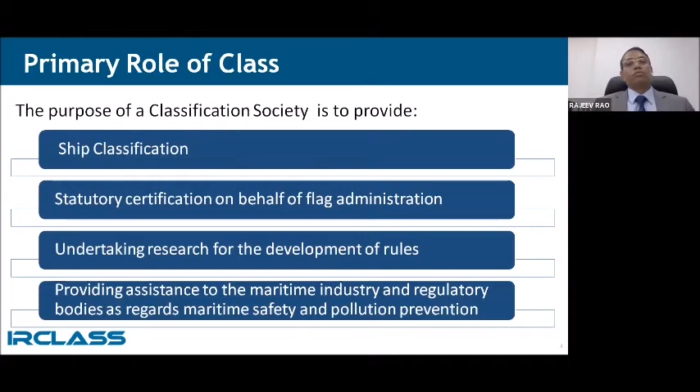So the role of the class is changing every day, because what the class role used to be 10 years back, that is not there now. The role of the classification society has changed considerably. While enhancing safety of life and protection of environment remains at our core, today we are seen as a facilitator rather than a regulator. Within the larger realm of safety and compliance, we are helping the industry to comply with the various regulations. So to catch up with all these new requirements, new regulations, the role requires class to innovate and upscale its resources. We have to catch up with the technology, we have to catch up with the time.

What does industry expect from class? Because there are some expectations from the industry. The industry expects that class should provide guidelines in dealing with new subjects and new regulations, because they need the interpretation by the class and they need guidance from the classification society for the implementation part. Then the class society needs to have training and seminars to bring awareness to all the stakeholders. As I said earlier, the rules and procedures need to be developed as per the IACS and IMO changing rules and regulations.

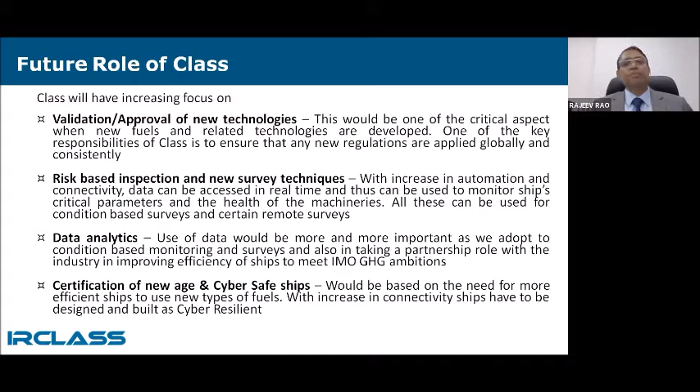Okay, this is the most talked about thing at the moment, remote survey techniques. Like other classification societies, like other inspection bodies, IRS has also adopted this technique because COVID-19 pandemic accelerated the use of remote surveys. Now, when the travel restrictions are there, no one can attend the vessel, no one can travel. This has become the only tool to keep the certificates validated, to keep the global supply chain intact.

Of course, the classification society received very able support from all the flag administrations by means of their communication, by means of the circulars released by them. But as a classification society, we very proactively developed a procedure, the uniform procedure to carry out remote surveys. The advantage of this procedure is there is a uniformity all over the world. Wherever you go, whichever port you are offering the vessel for survey, the requirements remain the same.

So the moment we receive a request for remote survey, we are following the procedure. We communicate to the owner managers with the requirements, and so they are also very comfortable. They also know what is the expectation by the classification society. So this is remote survey process. The flag concurrence we are taking for all statutory surveys, or wherever we need some advice from flag, we are communicating with them. We are taking their point of view, apart from the circulars which they are releasing time to time.

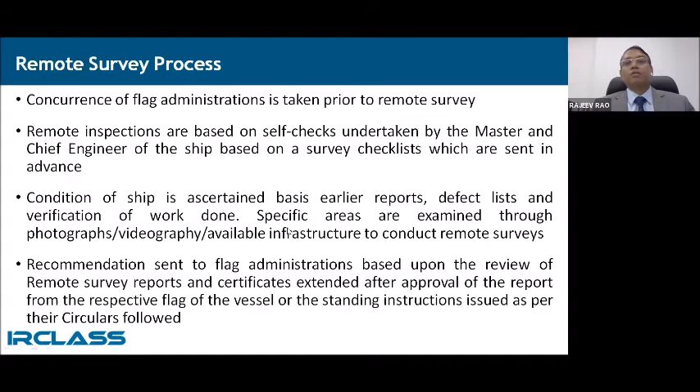Okay, so as you all are aware, this COVID-19 is going to stay for some time. And as a matter of fact, one needs to adopt a policy. What happens after COVID-19? So we are developing a tool that even after COVID-19, just to minimize the travel of the surveyor and the cost of the owner, based on the experience gained by us, we may extend our surveys to credit annual survey, docking survey, and various other surveys. So for that purpose, we are developing the infrastructure.

That means we are having the dedicated remote survey control room, which is equipped with the TV screen and the audio system. And similarly, we are training our surveyors for the use of monitors, webcams, and audio equipment. Of course, we need support from the industry because internet connectivity plays a very vital role for remote surveys, and it all depends how good is the connectivity. Because many a times we have seen when you go for live streaming, the footage is not so clear and it is not continuous. So it is very, very important to have good internet connectivity, and the owners need to also provide the infrastructure to facilitate remote surveys.

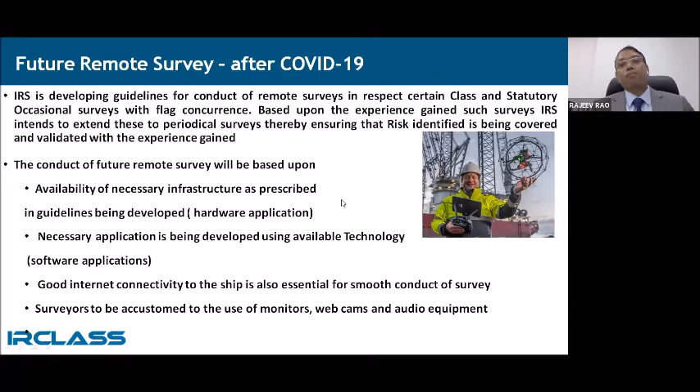And then IRS digitalization and new initiatives: we are issuing all electronic certificates. The drawings and plans are submitted, reviewed, approved, retrieved, all electronically through our website. We are archiving all the plans, all the manuals, all the records electronically. Survey requests are being made through website and mobile application. We are into vessel performance analysis and energy efficiency analysis, cyber security, and we are working for autonomous ships.

The IRClass website, you can visit our website www.irclass.org. It has got a lot of information. Please do visit our website and give us the feedback. The drawings are all submitted through this website. Even the survey requests are done. Service supplier approval requests are made through this website.

We have a mobile application which can be downloaded from Google Play Store and Apple Store, which has the features of survey request form, the list of type and works approvals, upcoming regulations. You can search any ship. We have technical circulars also, our rules and notification alerts; like new rules and regulations coming into force, you will keep getting the notification.

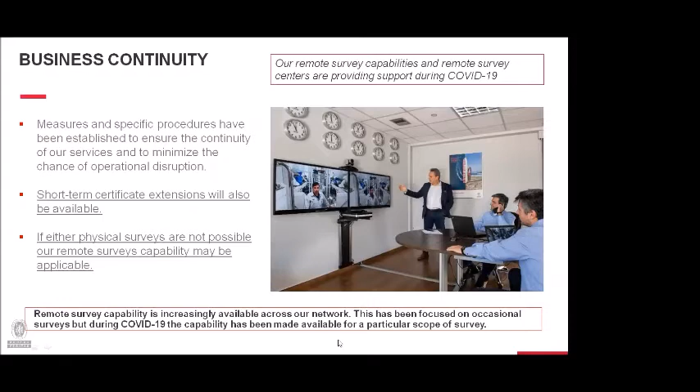Yeah. Can we go to the next slide, please? Okay.

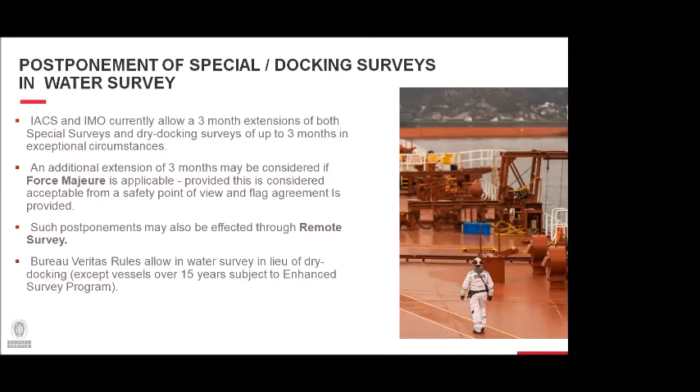And of course, speaking of remote surveys, these are applicable also for ISM, ISPS, and MLC audits, extensions to a certain extent. We're doing that. And to cover all, I must mention that new building surveys also, to some extent, could be done via remote survey. For new building surveys, surveys at yards should be done considering the HSE conditions are met. Participation of BV surveyors in sea trials may be allowed in accordance with required HSE requirements as well. These requirements must be established before a sea trial happens and maintained during the sea trials.

Postponement surveys, of course, can be done for boiler surveys. 3-month extensions as a standard under the strict IMO and IACS rules can be granted. And further 3-month extensions are possible in force majeure cases, proving the force majeure cases. We mentioned continuous survey machinery items and, to a certain extent, again, life-saving and firefighting appliances and systems can be postponed or remotely surveyed.

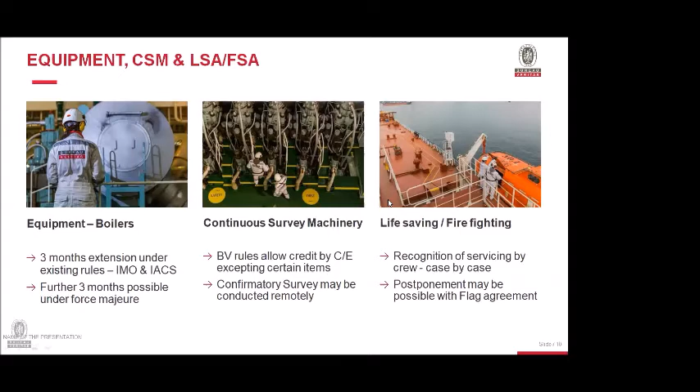Yeah. Next slide, please. Next one, please. Thank you.

Yes. To sum up the first part of my presentation, I must mention again that the health and safety of the people, clients, BV people, crew on board, and all stakeholders is paramount. On the other hand, the global continuation of BV surveys during this pandemic period is vital to support the shipping industry and business without compromising safety.

In the second part of my presentation, I would like to give a quick look at recent developments with regards to digitalization or digital transformation. Not just now, but over the last year, the popular word is digitalization or digital transformation, as you all know, everywhere, in every segment, in every industry. Today at Bureau Veritas, we are on track to take the next step in digital transformation, what we call digital classification, because we believe that this is the future of classification.

So how does this work? We ask 3 simple questions. First, does the ship have any expected surveys or audits in the near future? We know the answer to this question. Through our systems and software, we know what survey is coming next month. The second question is: in which port is the ship expected in the near future?

We are in cooperation with several industry players through our partnerships to get the data through AIS data partners. Or simply, of course, clients can give us this information upfront. And then the third information: are there any qualified and available surveyors in this expected port?

And then after these three questions, I must say that our little magic box is working, making optimization and coming out with an outcome proposition to owners, telling them that your ship is going to blah, blah port on that day, annual surveys are due, and we have Mr. A available on that day. And it's just up to the superintendent to click the button and confirm the surveyor.

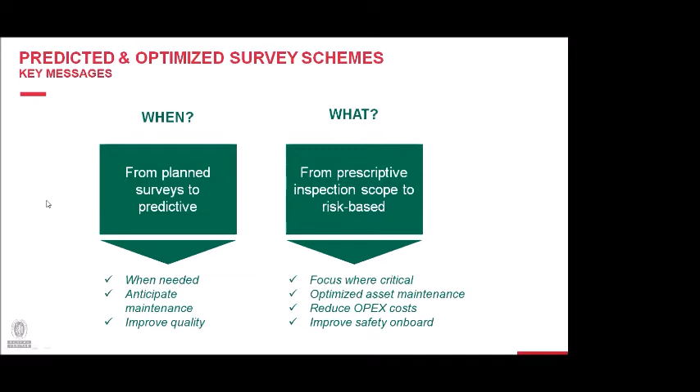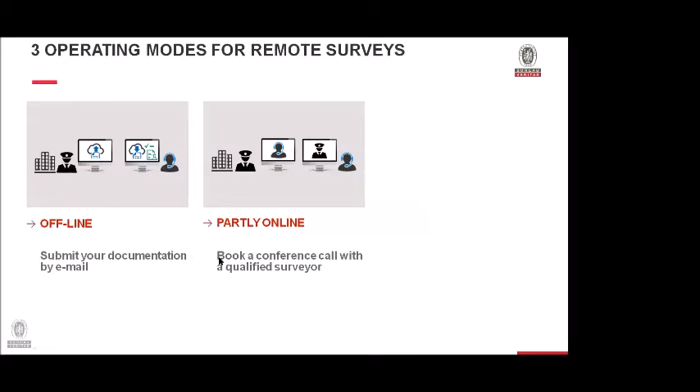And another topic, of course, next slide, please. Next one. Remote surveys. We are looking at remote surveys from the Bureau Veritas point of view. We are grouping them in three categories: offline surveys, partly online surveys, and fully online surveys. Offline surveys are pretty simple, and partly online surveys work the same way.

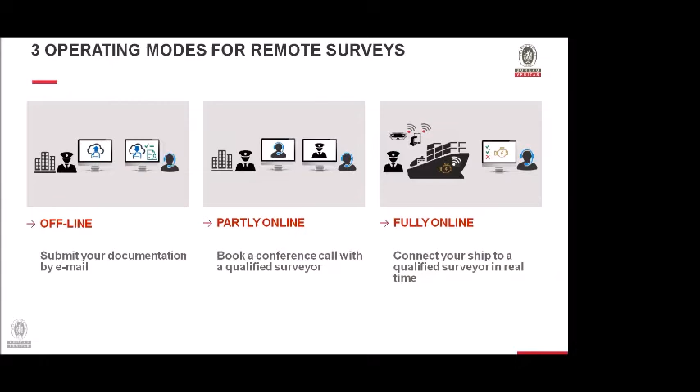Just submittal of the videos, objective evidence, documentation, reports, records via email or through any software environment is enough for us. We are deleting recommendations as much as possible, after strict evaluation by our technical experts, or postponing. When it comes to fully online surveys, next slide, please. Yes.

Fully online surveys, as my colleagues mentioned before, are through a video tool on board the ship. However, as we mentioned before, we must analyze these requests well in advance. We have to understand whether the full online survey is necessary, or can we do some of them through documentation? Our head office decides which survey scheme will be applicable. If we decide on the remote survey, we approach the flag administrations for their consent, for their agreement. And then we appoint a surveyor.

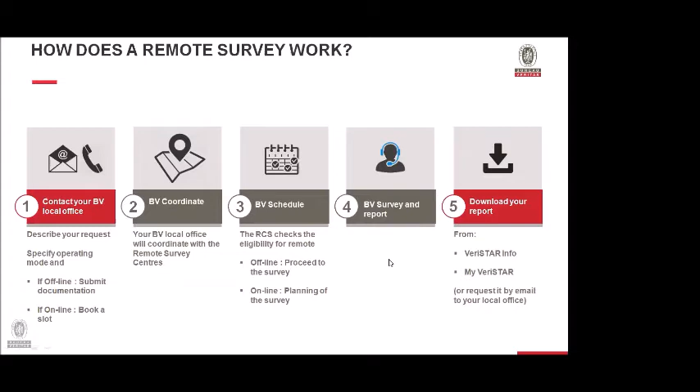The remote survey is carried out on board. As soon as the survey finishes, we update our system. Then in a given time period, the BV survey report is issued. And then this report is made available to all industry players, from the ship owners to the flag administrations, of course. And again, as I mentioned, it's pretty simple. Can we have a look at the next slide, please?

Yeah. It may sound complicated, however, through a video conference tool, we're just sending one SMS to the person on board the ship, master or chief engineer or superintendent. And all he needs to do is click this SMS, and by doing that, the video tool opens, and then we control it. It's pretty simple. No license is needed, no application is needed, no specific equipment is needed. As mentioned before, all we need is a reasonably strong internet connection, of course. Yes.

And speaking of the future, by doing this digitalization, we are slightly moving, however not abandoning the present service. We are moving from on-site verification to remote verification. I would say here we are a little bit behind. I think the marine industry is on the way, following the big brothers such as the aviation industry and offshore industry, where these things have already been implemented satisfactorily for many years. Next slide, please.

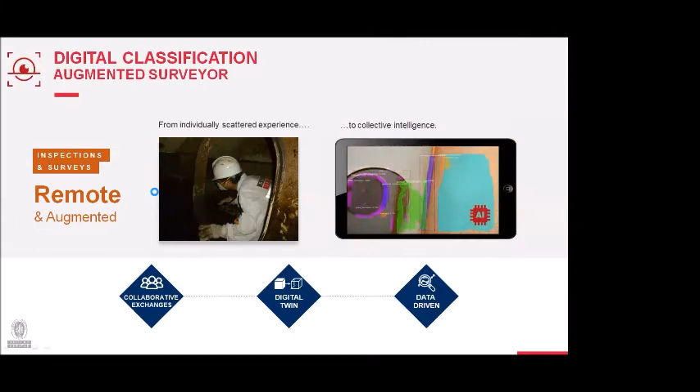And of course, another popular subject is moving from surveying to remote inspection techniques, wherever possible, wherever reliable, wherever trustable. And one final word about that, next slide. To include AI. Moving from the typical conservative finding survey system, we are moving to the inclusion of artificial intelligence in every area.

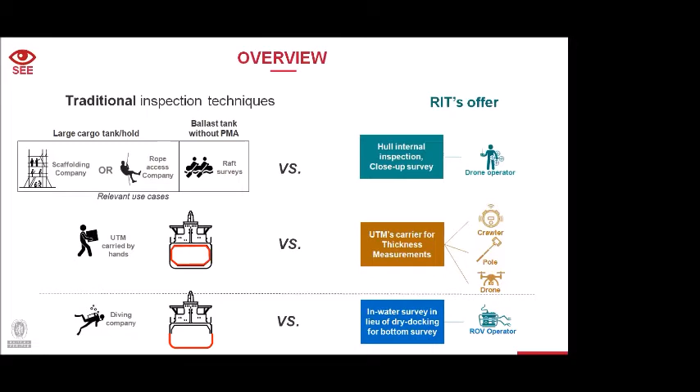And we have opened several remote survey centers, in Rotterdam and Piraeus, and I'm pleased to inform everyone once again that by June we have opened the remote survey center in Dubai as well.

Finally, a few words about e-certificates. Bureau Veritas is issuing electronic e-certificates starting from 2018, in conformity with the IMO guidelines, Circular 39, guidelines for the use of electronic certificates. These certificates are being issued at the request of ship owners or ship management, in replacement of paper certificates.

I must mention that this is after agreement from both flag administrations and ship managers. Once we issue the certificates, we send them to the recipients agreed with the ship manager, and upload them to our website and mobile applications for archiving. Needless to say, switching to e-certificates will reduce time and cost for issuance of the certificates.

All interested parties will have real-time access to the certificates. It will facilitate certificate management. You can combine it with other certificates, from ISO certificates up to class certificates, avoid loss or damage of certificates, and verify authenticity and validity very easily through a small application. And definitely, it will help prevent fraud.

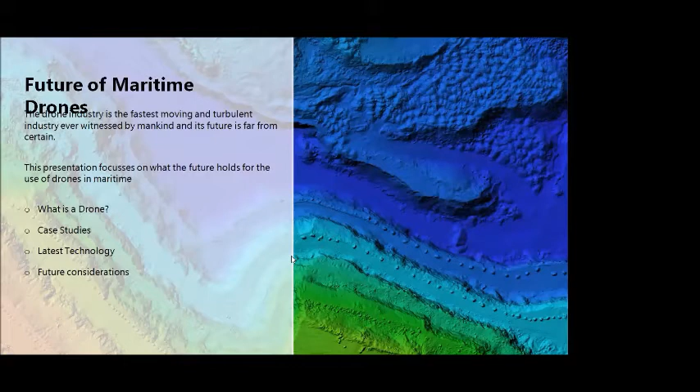As you said, the drone industry is a very fast-moving, very turbulent environment. This presentation is really just scratching the surface, but there's one key point I want to make right the way throughout, which I'll summarize at the end. What I'm going to cover is one important topic, which is what is a drone. I'll cover some case studies around the use of drones in maritime, and give you a little taste of some of the latest technology and some future considerations. Could I ask you to go to the next slide, please?

Okay, could you click again, please? Okay, so the important thing to recognize is that whilst you might all have in your mind, when you hear the term drone, a small spider-shaped flying object, the truth couldn't be further from that. The ISO definition, the International Standards Organization definition, is there: it's any unmanned system that is autonomously or remotely controlled, which means it includes driverless ground vehicles, driverless cars, ships, submarines, aircraft, spacecraft, humanoid robots, and anything in between.

Okay, if you just click it once more, please. And that's why we use the acronym Surface, Underwater, Air and Space. I believe that we are the only organization in the world able to advise on the application of drone technology across all of these environments. So when I give this presentation today, please bear in mind that I'm looking way wider than just small air vehicles. Next slide, please.

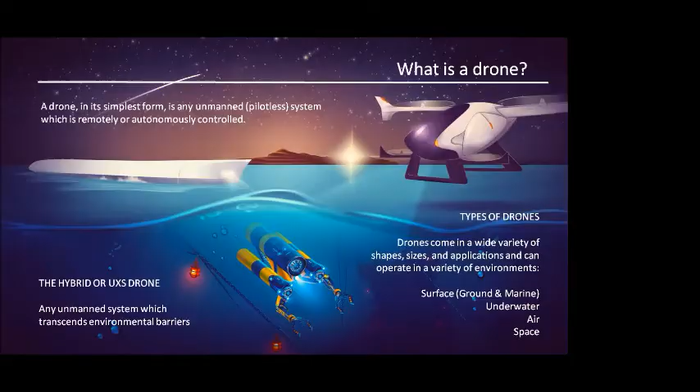Okay, so firstly we'll just look at some case studies.

So looking at underwater inspection, I think this is a well-known application. The cleaning of vessels underwater is absolutely critical, because a 10% buildup of fouling on the hull of a ship will create something like a 40% increase in the fuel required to drive it. So absolutely key. And the technology in this area is moving forward at a phenomenal pace, really due to industry's demand.

Also underwater inspections - unfortunately in the maritime industry we kill a number of people every year by sending them over the side of ships to inspect or repair vessels in the water. I think the days of that are coming to an end, and certainly we're working on a number of projects in South Africa where, if you look at the bottom right-hand corner of your slide, this is a remotely controlled, half humanoid, half ROV piece of technology that can be used for limited maintenance, and I'll show you some more technology in a little bit. And of course, the ability for remotely controlled systems not only to maintain but to repair is with us today. This technology exists, and these applications are, as you can imagine, very, very important.

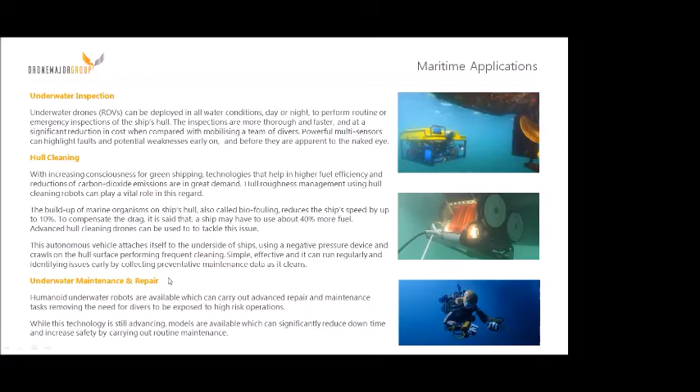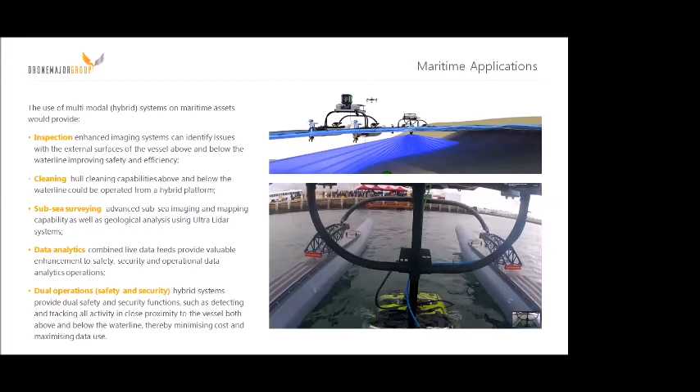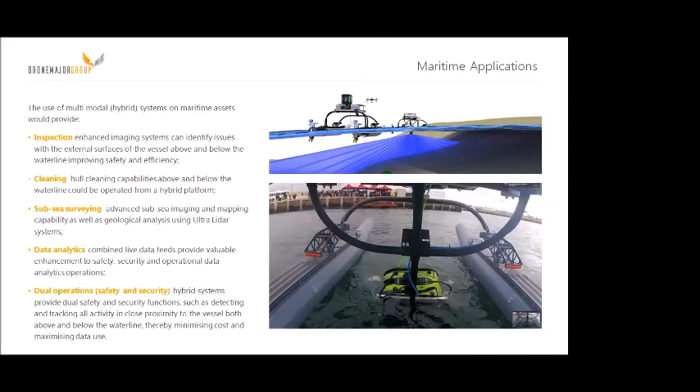Okay, so in terms of actually inspecting underwater, it's not just necessarily about the vehicle. What's also very important is the sensor technology that you carry on your vehicle, and the advancements in sensor technologies is amazing. In fact, we were looking here in the UK for the oil and gas industry at a piece of equipment that can, for the first time ever, detect rust even underwater, utilizing a multi-layer of sensors to do that. So the ability to remotely sense, detect and repair, utilizing advanced compounds injected into cracks or to cover wear on ships - it is again with us now.

Obviously I've already covered cleaning. Subsea surveying is very important - we're going to come on to that in a little bit. But what's also very interesting, and an area that's I think more important than anyone understands, is the ability to extract data when you're carrying out these operations. So whether you're cleaning the underside of a hull, or cleaning a hold on a ship, or inspecting it, or surveying it, or looking at an entire vessel to see where the damage is - whether that be for insurance purposes or for general maintenance - we work with a number of shipping organizations in the world to assist them in how to do that.

These operations, which in the past have been carried out by humans, are very dangerous. They are time consuming, they require a certain level of skills, so they become very expensive. As soon as you start looking at the wider range of autonomous and remotely controlled systems to carry out these tasks, it becomes a lot easier. But what's more important is, once you've got the data that you've extracted, how accurately can you analyze it? How can you build up patterns? Can you develop a maintenance pattern by looking at failure rates over time? So that's really important.

One of the key points I want to bring out here is that a single autonomous system, such as a small flying drone on its own, is of limited use. So certainly in the maritime industry, but also in other industries, there's a move towards hybridization - and I don't mean hybridization in terms of utilizing different engine types, I'm talking about vehicles that can operate across environments: surface, underwater, air and space. So in this instance, if you look at the image at the top, you'll see a surface maritime autonomous system, called WAM-V, which operates an autonomous air system that mates and lands with it either on a tether or remote or free flying, and it also operates an ROV. So that's a single 3-environment system, a hybrid drone system, where you can get far more utility.

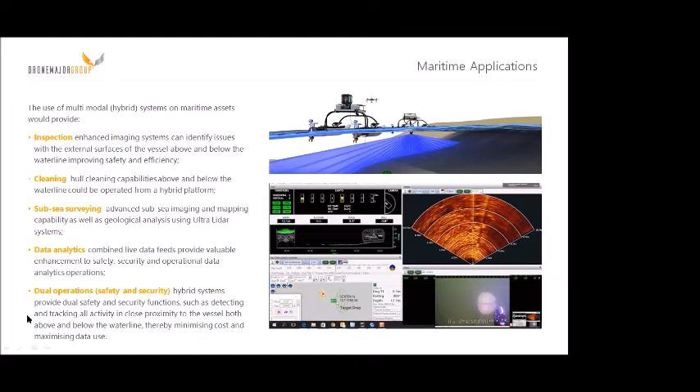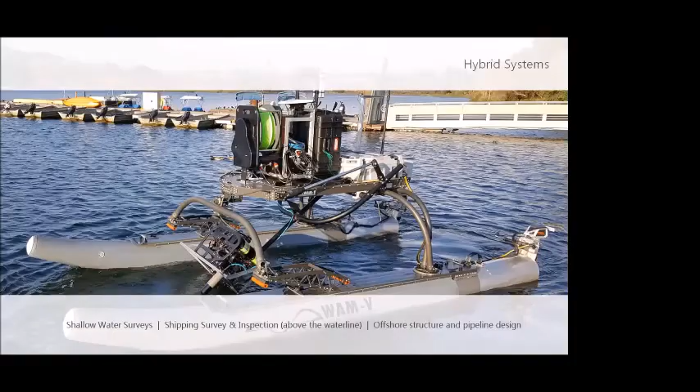So I wanted to hone in on the WAM-V vehicle. This is a multi-configurable autonomous vessel, almost impossible to tip over, and you can get it as small as 6 foot or as big as 56 foot. You can launch all sorts of vessels and technology from this platform. As you can see, it's very configurable. This particular one has an ROV which has been deployed and an air vehicle that's actually in the air, out of shot of this particular vehicle.

There are a number of vehicles like this which can operate air, surface, and underwater, and they're very useful for all sorts of applications, such as low-level surveying under the water, inspection, maintenance, as well as environmental monitoring, which is also quite important. Next slide, please.

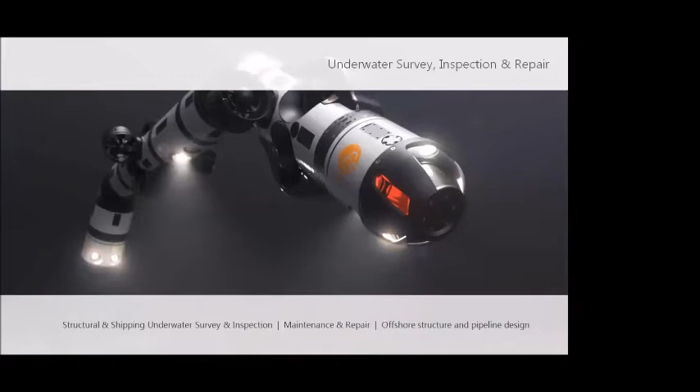So this is what's called a snake configuration. There are many vehicles that operate in this configuration. The great thing about this is that it's got super maneuverability. It can go very deep if necessary, and on the front end you can have a number of items linked on. So not only can it be used for surveying and inspections, you can also use it for limited maintenance or operations under the water.

So if you have a certain amount of things that need to be done underneath the vessel, or if you're surveying offshore assets and you need to make a number of adjustments, this vehicle can do that for you. Very, very powerful. Next slide, please.

If you're looking at more free-flowing surveying of offshore sites or pipelines, or environmental monitoring, systems such as this, which are obviously fish-shaped - this one's a shark - are very powerful. This is a mid-range offshore survey and inspection vehicle, and of course it's used in environmental applications as well. Next slide, please.

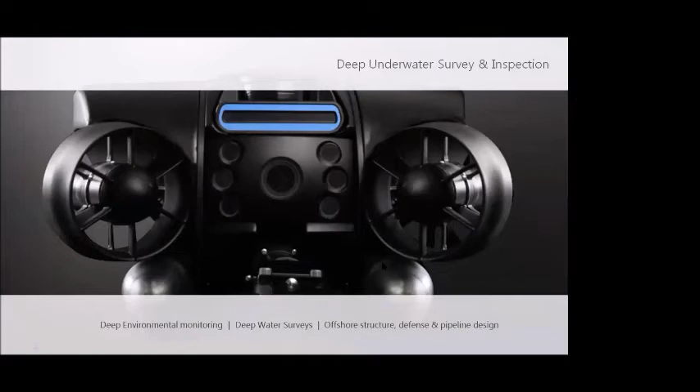This item is a very deep ROV, which again has advanced sensor technology, multi-layered sensor technology, which we'll come onto in a minute. But it enables you to go a lot deeper. Again, it's offshore, but on a deeper shelf.

Next slide, please. And if you really want to go deep, of course, you could use the Echo Voyager, if you've got the budget for it. This is super, super deep, long-term surveying, as well as obviously military applications. Next slide, please.

Okay, so more important, I think, almost than the platform is the payload technology. And again, this is such a big topic, I can only really scratch the surface. So if I just touch the next slide, please.

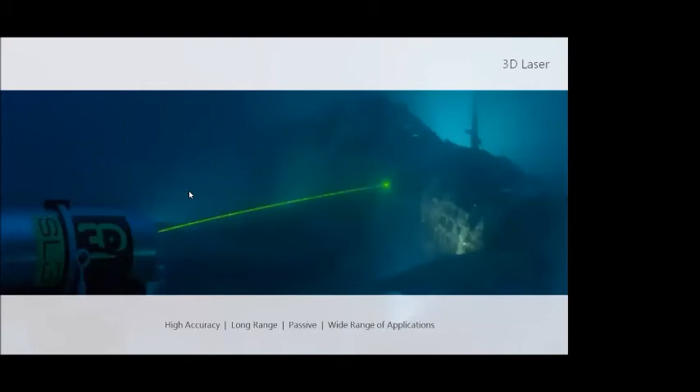The first one is, of course, laser. There are a number of laser applications, laser 3D, 4D applications, systems which can extract massive amounts of data very accurately, either from underneath your vessel or from the sea floor, if you're inspecting plate inspections or environmental inspections.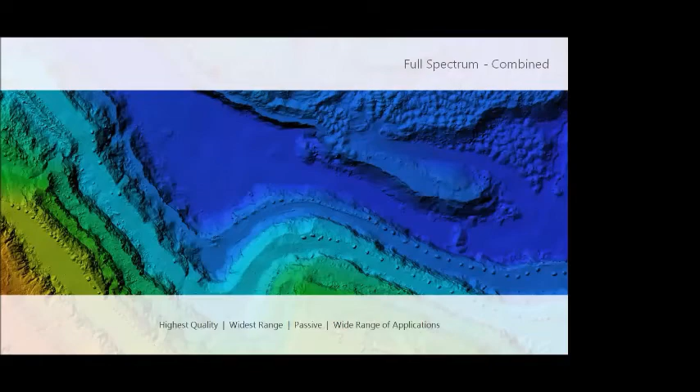Next slide, please. And your full spectrum stuff, which is where you really get very high resolution, deep surveying stuff. And of course, all of this technology can be used on vessels as well as on the landscape. And the final slide, please.

There's a hell of a lot you can do with that in terms of increasing the accuracy of your positioning. Think surface drones, okay? So carry out sensor tests from that, and certainly if you're looking at shipping above the waterline and below the waterline, hybridized systems are very good. Subsea drones, of course, they're becoming far more advanced than they used to be. It's an industry that was quite suppressed by low prices coming out of the oil industry, but now we've broken out from that. So there's a lot of innovation going on with subsea drones.

Think data analytics. This is the piece that most people get wrong. They go out and they buy something off the shelf, they try to use it, and they're probably getting 10% of the ability that they could have from it, because they're not thinking long term, they're not thinking analytics, they're not thinking modeling. You can make your organization far more effective. You can actually preempt maintenance if you do this right by gathering enough evidence over time. And think multimodal or hybrid. If you hybridize your systems, you get that force multiplier, you get far more for your money, and you get far more capability. Next slide, please.

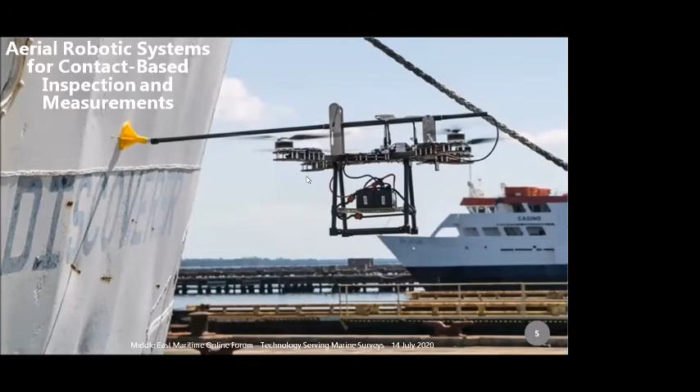So robotic measurement technology with the highest potential for use in maritime assets are the ones that fly and physically make contact with the surface to gather data. Maritime assets are not box-shaped structures. Ships, for example, are complex geometries optimized to reduce drag coefficient. These flowing lines make robotic maintenance, inspection, and measurement difficult and challenging. One of the great things about aerial robotic systems is they can adapt. They can easily conform to non-linear surfaces, while other robotic or other techniques have a long adaptation curve.

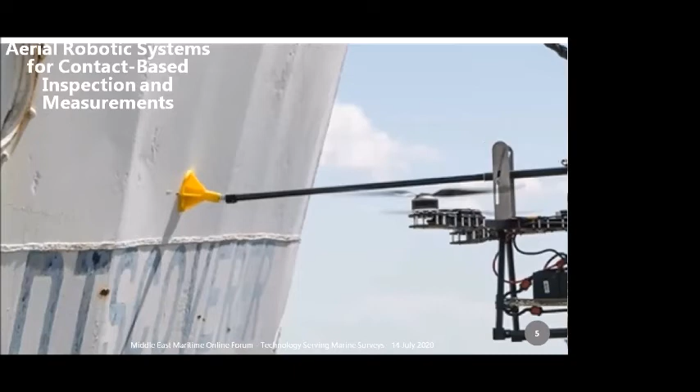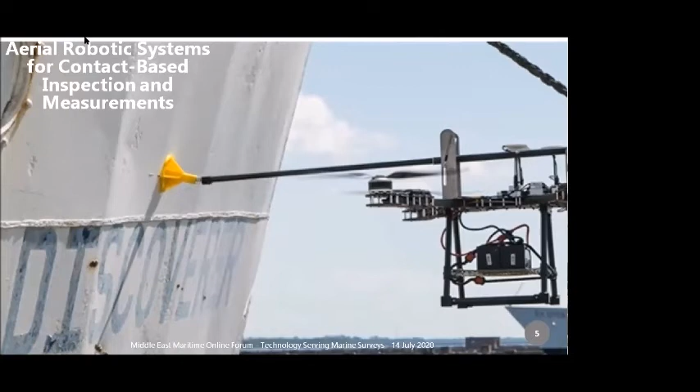The patented robotic system discussed in this presentation flies up to a structure with a metal substrate, then under full autonomous software control, touches a non-destructive testing measurement probe, UT probe or DFT probe, to the target, and records the corrosion monitoring location measurement data compliant with ISO, ASTM, API, SSPC, or other standards. Next slide.

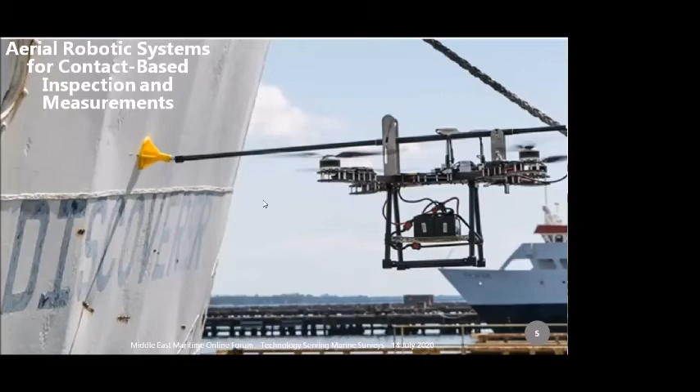So aerial robotic systems can dramatically reduce non-destructive testing and evaluation costs without reducing quality or capabilities. They allow delegation of the dirty, dull, and dangerous part of the job, the data collection, to the robotic system. Two most common components of this are ultrasonic thickness, UTT, or dry film thickness, DFT. Completing these measurements with aerial robotic systems frees the ship surveyor, examiner, or corrosion engineer to focus on higher value duties, allowing work flexibility and enhanced productivity.

Shipyards and dry docks demand continually enhanced productivity, cost reduction, fast throughput, and process optimization to stay competitive, and aerial robotic systems can enable just that. Next slide.

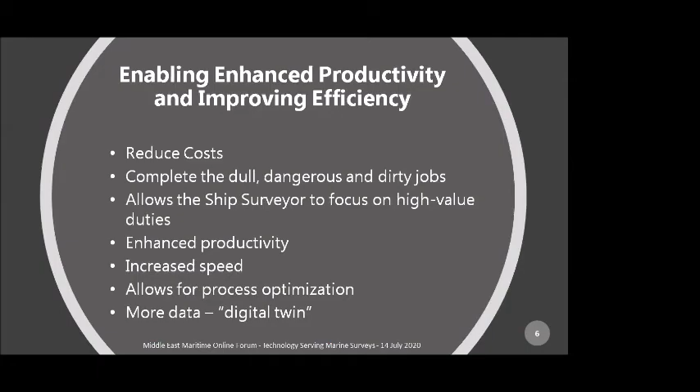So the electronic measurement devices have a long history of measuring ferrous substrates. According to Wikipedia, the first ultrasonic thickness gauge was made in 1967. These electronic devices, AKA magnetic film gauges, eddy current gauges, ultrasonic gauges, are used to non-destructively measure the thickness of a non-magnetic coating on a ferrous substrate, the thickness of a metal substrate, or other uses. According to a major manufacturer of these devices, quote, most coatings on steel and iron are measured this way.

So non-destructive testing magnetic gauges work via magnetic or electromagnetic induction and measure the change in magnetic flux density at the surface as it nears the steel surface. By measuring the flux density, the thickness of the coating can be determined. NDT eddy current electronic magnetic gauges use a constant pressure probe to provide thickness readings, frequently shown on a liquid crystal display on a handheld electronic unit that's held by the ship's surveyor or corrosion engineer. And these are very accurate devices with measurement tolerances of plus or minus 1%.

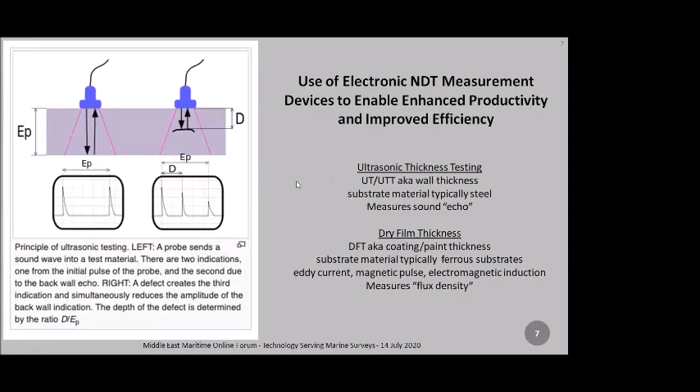So measuring a ship's hull for wall thickness or coating or paint thickness often occurs when a ship is in dry dock and multiple services are being performed. Wall thickness measurements or UT measurements use ultrasonic pulses or echoes that are sent through the metal and read by the device. For example, ultrasonic thickness gauges that measure wall thickness are mounted on software-controlled precision flight aerial robotic systems, and they're versatile devices ideal for measuring the effects of corrosion or erosion where access is limited to one side. The multiple echo through paint models measure the metal thickness of painted structures without having to remove the coating.

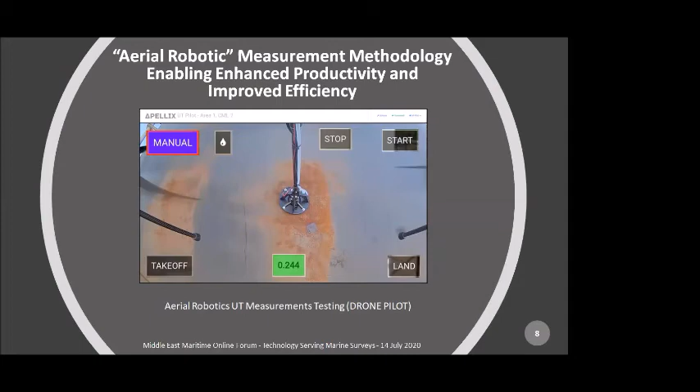This screenshot here is the onboard view of the robotic arm making contact with the structure. Embedded in the end of that robotic arm, in the end effector, is the magnetic probe tip to take the measurements, or the ultrasonic probe tip to take the hull measurements. So these systems are very dependable, reliable, have been in use for quite a long time. Mounting them on an aerial robotics system and connecting them to the onboard computer allows for the gathering of additional data that is not typically collected by the corrosion engineer in the field. Next slide.

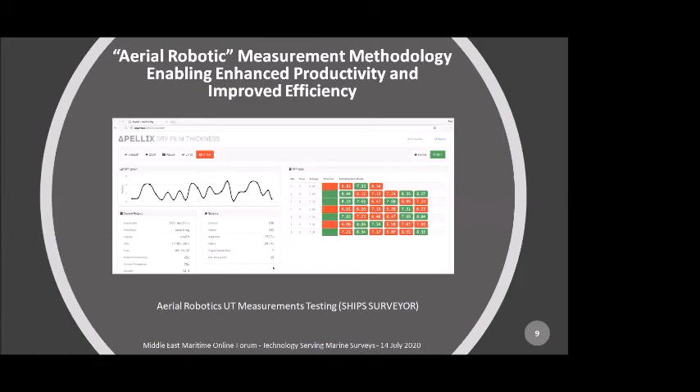So for example, dry film thickness standards, such as those by the Society for Steel and Protective Coating, SSPC PA2, are frequently used to ensure that the coating or paint is properly applied or to estimate the remaining life of a coating job. The SSPC PA2 standard sets a number of places and required number of measurements that must be taken within the space. For example, 100 square feet or a 10 by 10 foot area, you would select 3 areas for the first 1,000 square feet and 1 additional area for each 1,000 square feet. And then within each of these designated areas, 5 spot readings would be randomly collected. Next slide. And if you could go ahead and press play on the video.

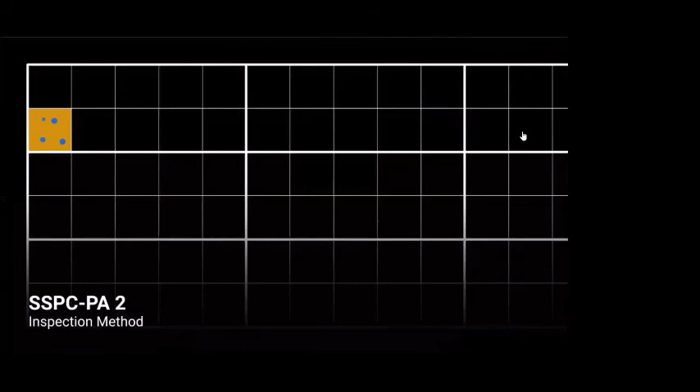So what you're seeing here is that completing SSPC PA2 measurements on an entire ship's hull is time consuming. It would also, again, require a lift or scaffolding or other method of putting a worker at height, potentially fall reduction or risk mitigation strategies. It involves resource allocation issues, and it's not unusual to get only a few measurements per hour. An autonomous computer-controlled aerial robotics system, for example, can take 100 measurements or more per hour while gathering additional data and information not currently collected.

Next slide. So flying computers or drones next to structures is very difficult. Next slide on risk. And it's especially difficult if they're manually flown. So drones are not built to make physical contact with structures or fly close to structures. So what Apellix has done is automated their drones so that they're flown by the onboard computer, and the software is making 50 micro adjustments to the flight per second, something impossible for human pilots.

So it's very critical that if you're using a drone inspection system to make physical contact with the structure for ultrasonic thickness or dry film thickness measurements, that you use a system that has automated flight. And there are a lot of advantages for using a system like that. In addition to the increased productivity, health, safety, and environmental rules and practices can greatly benefit from an automated aerial robotic system that gathers these types of measurements.

There are multiple entities involved in dry dock safety, from the facility owners and insurance companies to the local and national regulators, even standards and inspection organizations such as IMO and other bodies. Classification societies may carry out safety inspections in accordance with IMO regulations. And to a large extent, much of workers' safety in dry dock depends on safety practices and procedures, in addition to the class society, governmental, insurance, and other safety guidance and regulations.

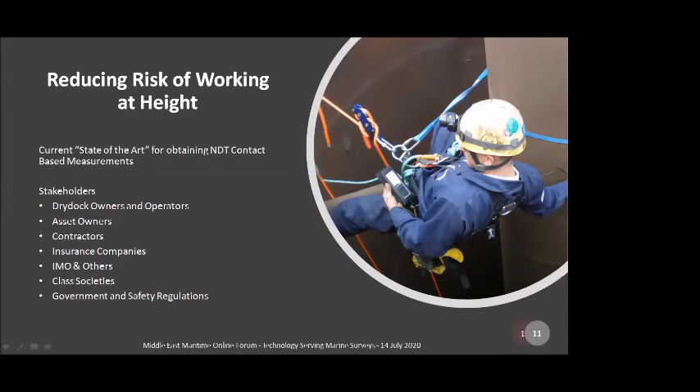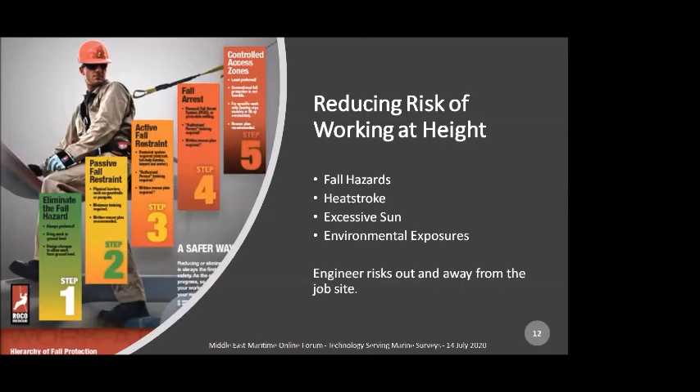Next slide. So today, human inspection accessing ships in dry dock or elsewhere to measure the thickness of the hull or the coating, they're using a JLG or cherry picker or lift, scaffolding. This is risky. To access a portion of a ship's hull at 20 to 30 meters in height creates a significant fall hazard. Falls happen. And unfortunately, fall accidents are far too common. There's also issues with heat stroke, excessive sun, environmental exposure, and more. So removing these risks by engineering them out and away from the job site is an elegant solution. Why put people at risk of falls or injuries when you can have a robotic system doing the work?

So in conclusion, autonomous unmanned aerial robotic systems used for inspection in the maritime industry, specifically contact-based ultrasonic thickness and dry film thickness measurements, have a great potential to perform jobs safer, better, and faster than if you were completing the same task with people. They can improve efficiency due to reduced inspection time. They can increase the efficacy by allowing for quicker reporting and faster decision-making.

They also reduce the spatial footprint currently required to collect the measurements by eliminating lifts or scaffolding. And they improve the inspection transparency as computers are better at gathering data than people. And finally, they are elegant safety solutions, potentially eliminating or at least reducing falls.